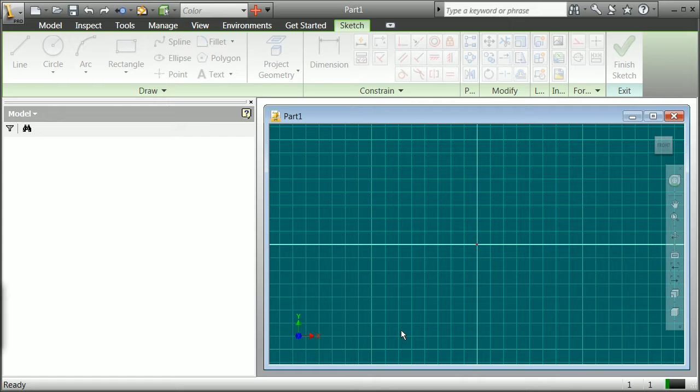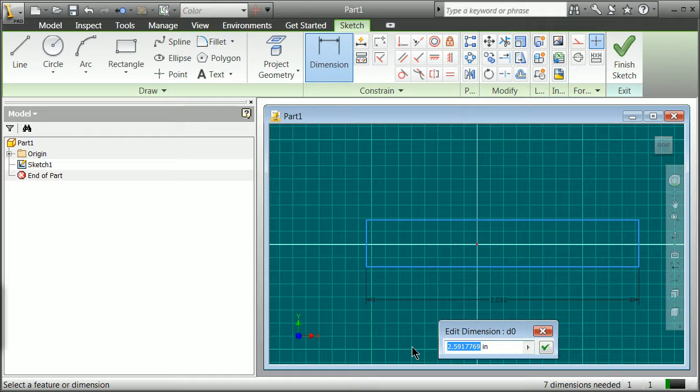So let's remember the basics of doing Inventor. First you sketch, and then you constrain—this is already constrained, so I'm not going to constrain—and then you dimension, and then hopefully maybe you even change those dimensions to be something that makes sense. And if you notice here, then you dimension again, and I'm going to make that somewhat sense.

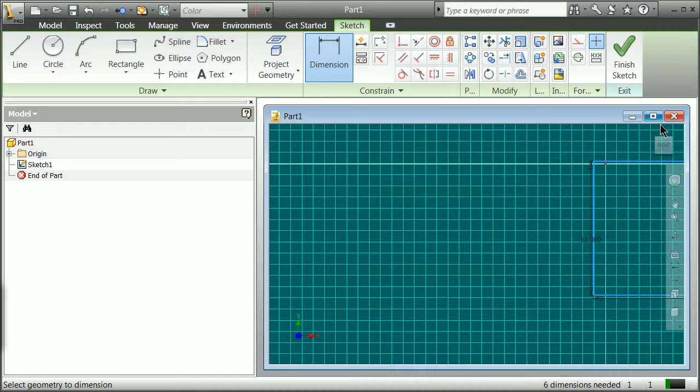You notice you've got to get units. You hit there, you zoom out however you know how, and then you hit finish the sketch, hit F6.

Extrude, think about what you're doing. In this case I'm going to push both ways, in other words a half inch each, hit OK. Think about my coordinate systems. Maybe I want to take a look at the center point, see where it was placed. I might want to make that visible so I can see it.

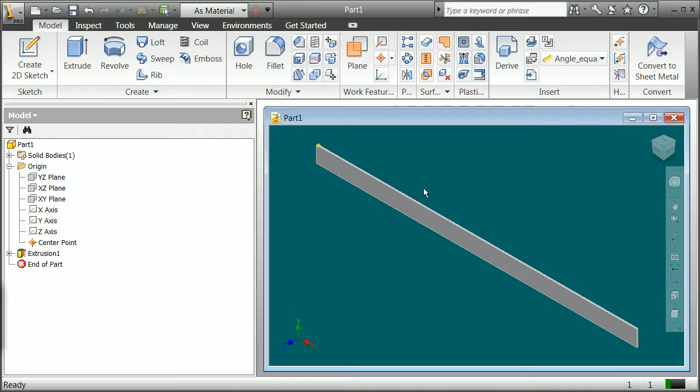But when I'm done, I then do File, Save As, and I know where to put it. So I'm going to call this... I don't know, Jack and Jill. Do a better job—figure out in the end how your directory structure works, so when you transfer things around, at least check and follow up with the facts. Hit save there. We now have made one part.

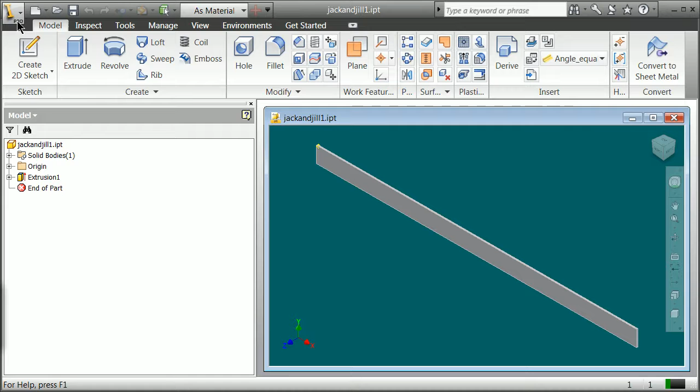I'm going to show you now how I think Mr. Hall's doing this stuff, and it's a great way to do it.

Open. We're going to go with new, now we're going to do an assembly, and we'll just start making all of our parts from within the assembly. Now you could have started this way, of course, but I think it's generally a nice idea to bring in one part.

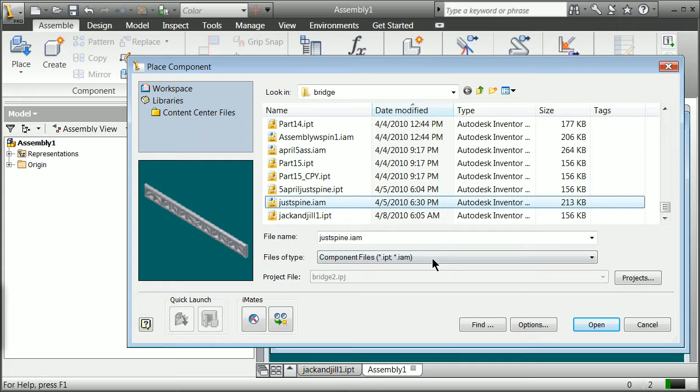I'm going to bring in Jack and Jill. Hopefully it's in here someplace. Learning you can go here and go to J is something many of us haven't put in our brains quickly enough. I'm going to bring in that piece, hit done. Now I can go ahead and go back to design, assemble.

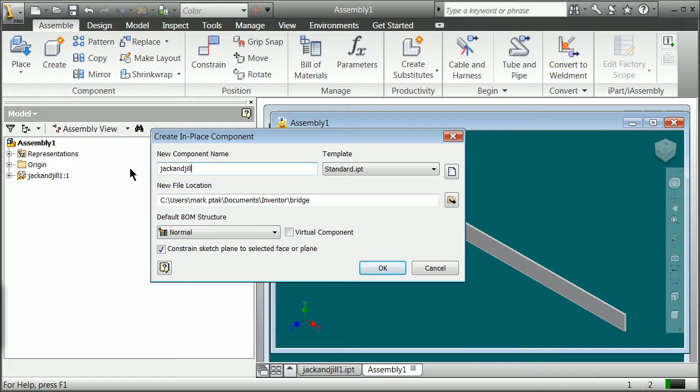I can create a new piece. I'm going to call it Jack and Jill 2. And I'm going to just, this time, hit OK, and I'm going to give it the face I want to design Jack and Jill 2 on.

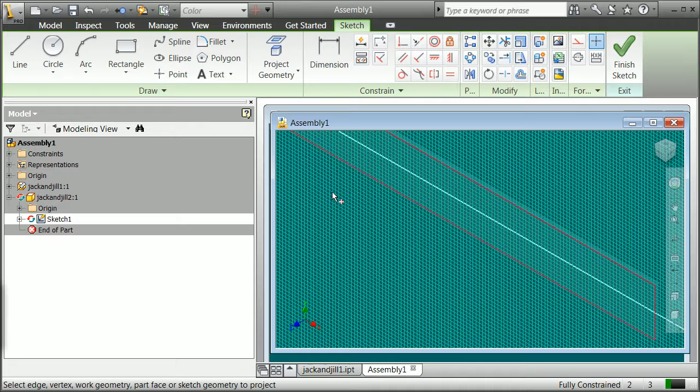Pretty nice, it's very faint, and I apologize for that. But one thing you can right away do is then project your geometry, and you can grab that piece, and now you've got the geometry projected on there. So now when you go to a rectangle here, you can kind of go across, zooming out a little bit.

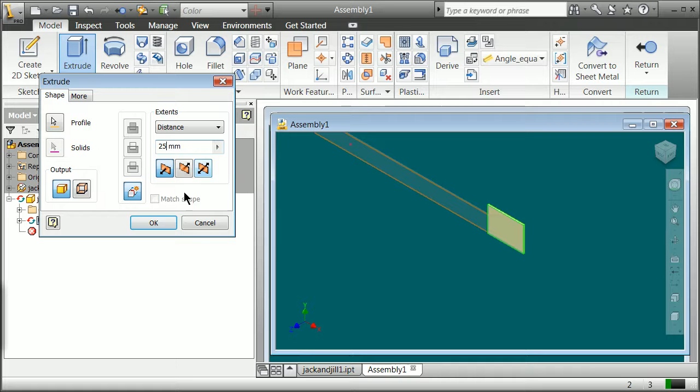Finish sketch. Extrude. This time I'm going to come out. Notice one of the things it did—it right away, sometimes it goes into metric. I don't know why that is, but you're going to grab the profile here, grab the profile of your thing, and you're going to give it maybe 25 millimeters. Out, hit OK. That part, return.

That part's kind of done, just so you know. That part is done. So you can go now, go to another one.

Zoom out here. And once again, you're going to create—this time it's going to be Jack and Jill 3. Hit OK. Grab the face—right away now that is your sketch plane.

I'm going to come across here. I'm just going to make this arbitrary. I'm skipping, of course, the constraint and the dimension. I apologize, of course, as always.

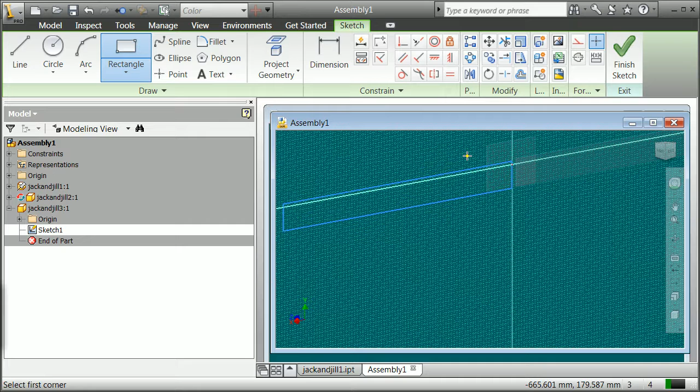And then right away you're going to extrude this one. You're looking at it from the back side. You can extrude it back out. We'll make this 25 millimeters, coming back towards us. Hit OK.

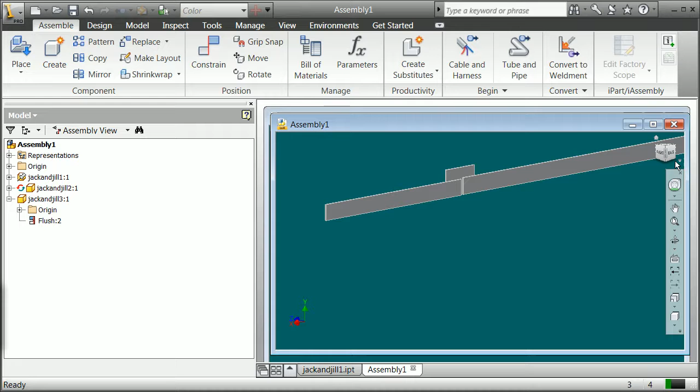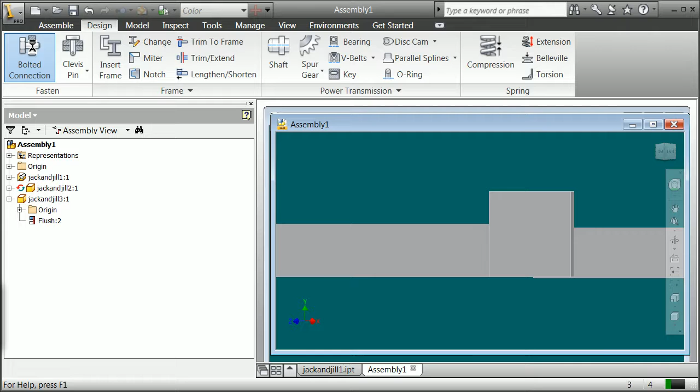I'm going to save this assembly. Jack and Jill. Ass 1.

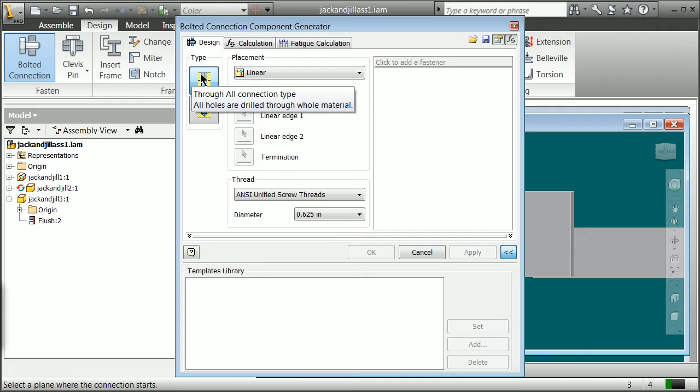You're going to go to your hole, your linear - we'll go ahead and pick a hole all the way through. My start plane is here. My linear edge here. Grab my linear edge here.

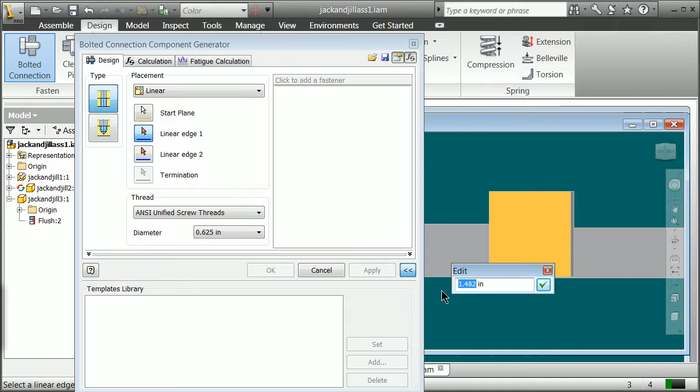Maybe I want it to be 3 inches. My linear edge here. And maybe I want it to be 4 inches.

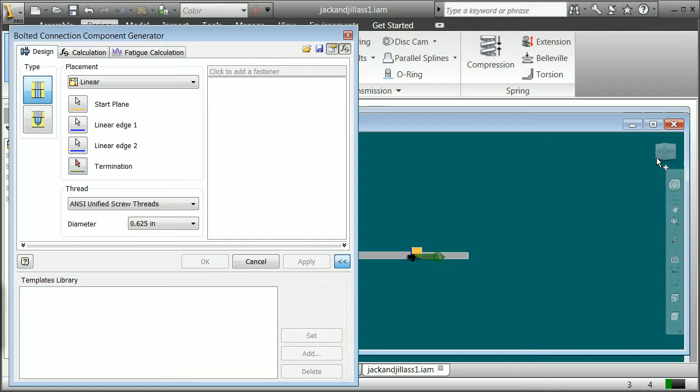And the last thing I've got to do is do the termination, and you have to look around the backside for that. I want to terminate this on this plane.

It does some calculations, gives you some things you might want to do, worry about. We'll probably come back to that hopefully by the end of the semester. If not, download this program.

Alright, so now you've got your basics - you can do a bunch of different holes, and I think what becomes interesting eventually is to actually make those holes and get rid of the fact that they're holes, then make them just things, like you did when you did things in AutoCAD.

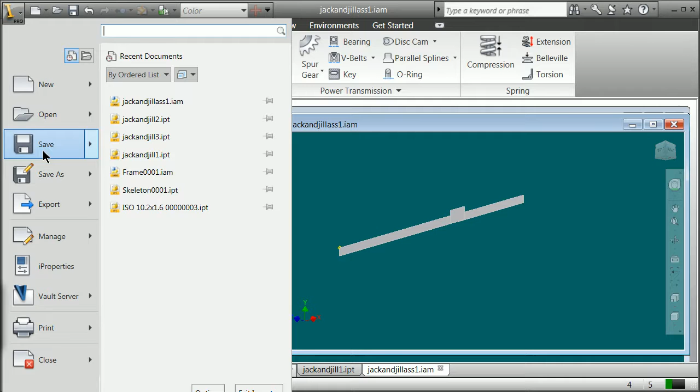Okay, I'm going to go ahead and do File, Save. I'm just going to constrain this the easy way right now - yes to all, I've got 3 minutes to do it. Real time all the way through a design, though, of course, not dimensioned and not put on a sheet of paper. We'll do that next.

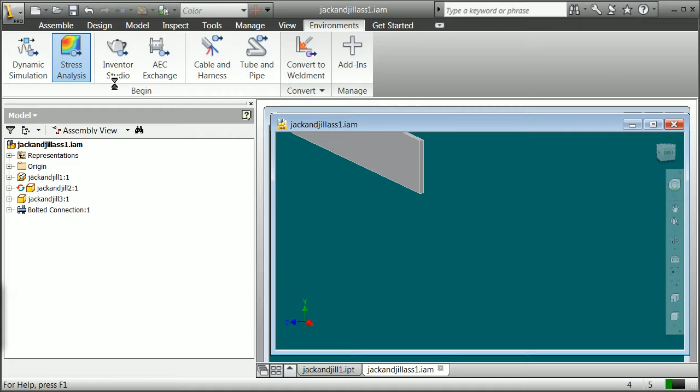I go here. I can go ahead right away now to Environments, Stress Analysis. We know we're going to have to give them some parts. We're going to create a simulation. Hit OK - lots of different simulations right away.

What you want to do is you might want to do the material first. It might make sense to go through this process like you do - go to Material, right click, Assign Materials. Look at what you've got, remember all kinds of different things. I'm going to try aluminum.

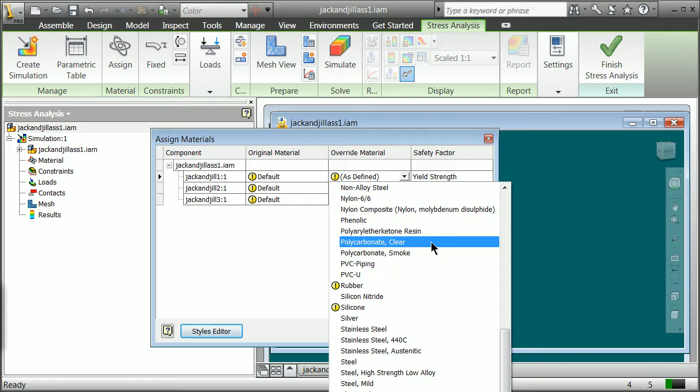What is the unit weight of aluminum? It is the unit weight of granite, they tell me - we'll check that in a little bit, right? Strength to weight, strength to weight. You guys now are quite aware of strength to weight, but also get involved in the stresses that occurred.

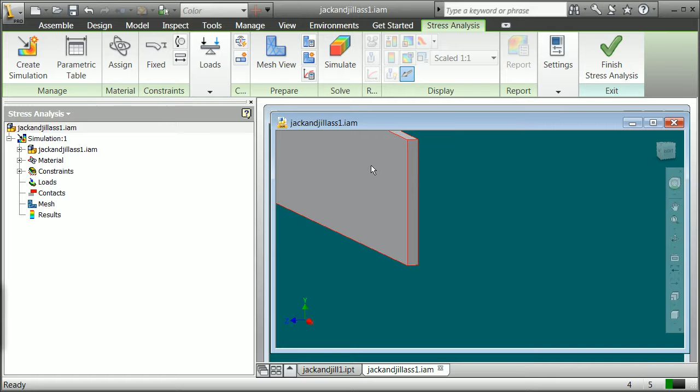So you develop the sense and apply a fixed constraint just to this one face right here, which is odd - so we've essentially got a cantilever. Now what I'm going to do here is go out here, and we'll see about whether this other piece is constrained when we go back.

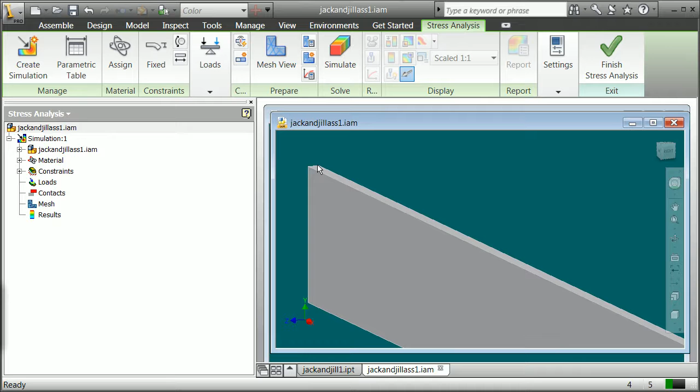We're going to go ahead and assign a load. Remember, we didn't turn these things around, so my load is going to be minus y - so that's one thing to get aware of. If you're going to be thinking about up, it should probably be z. We're going to go ahead and assign a load, a force, a location to the force right there out on the end, and of course always using vectors.

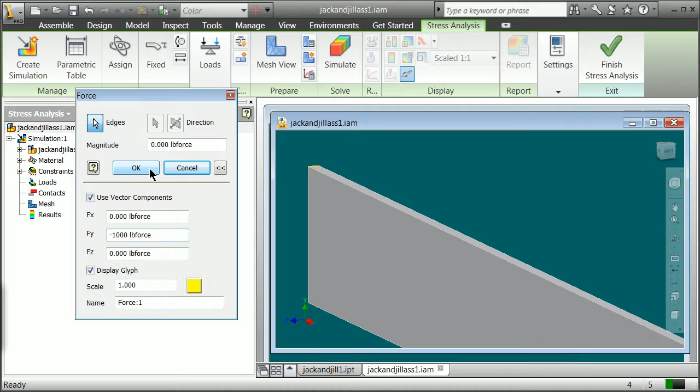That should put a contact between a couple of these because they're touching - don't know whether that's the case. Hit simulate, run.

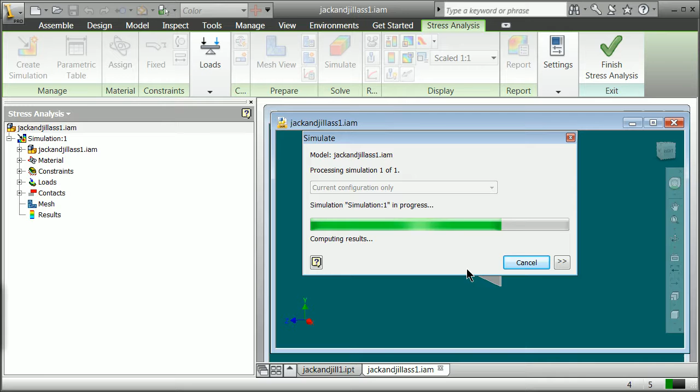There's your stress analysis - so think about doing that, that's how long it takes. And then get some dimensions on it, get a plot on an IDW, etc. I don't have time in these 10 minutes - that's making the plate and doing it. And then move on.